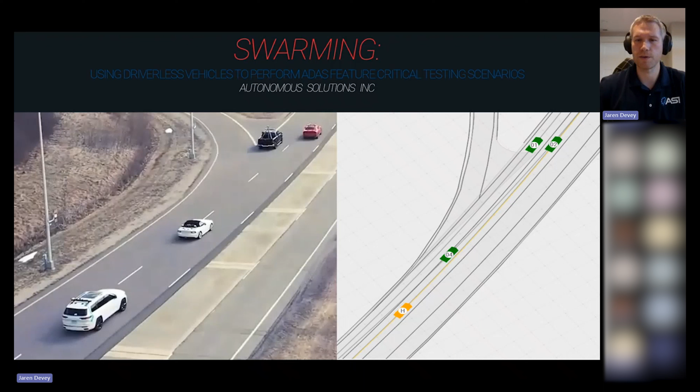So to answer these problems and be able to accelerate and produce more reliable testing of emerging ADAS technologies, ASI Automotive has developed autonomous systems capable of choreographed vehicle control. We call this swarming. Today, we will discuss what swarming is, why it's needed, and what are the results. In order to be able to present this material adequately, though, a couple of key ASI products and features will also need to be described. So we'll briefly discuss ASI's command and control software Mobius, as well as the ASI robotic system that interfaces with the vehicle. But first, let's just have an overview of swarming.

So, no awesome music. You may have seen some of our videos with some really good music, but I'll talk to some of these things here.

So the OEM vehicle, referred to here as the host vehicle, is shown as red in this video. The ASI controlled vehicles are referred to as target vehicles and are shown as white. This is just an example of the host vehicle sensing the target vehicles while the target vehicles are choreographed around the host. This invokes responses from the ADAS sensors on the OEM vehicle and the different functionalities. So these are real shots of initial testing of swarming with a simulated overview of the test.

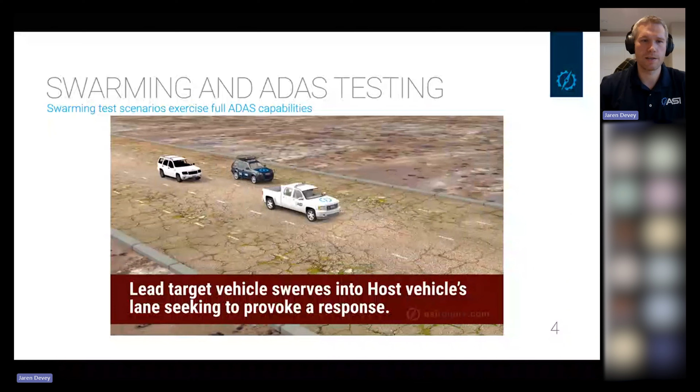And so this was one example that we did. The lead vehicle simply just passing in front of the host vehicle or the OEM vehicle. And this would elicit a response. Now this one is one of my favorites. This one I think of as someone missing their exit or about to miss their exit and crosses right in front of you on the highway. I'm sure this has never happened to any of us before.

But the scenarios presented in this video are only two of the several dozen scenarios that are already in use, many of which are running with 5+ vehicles at 65 miles per hour. So according to the levels of driving automation, we are currently testing around the level of L2+. This means that we are still technically in the driver assist realm, but incorporating a whole new layer on top of the traditional ADAS testing features.

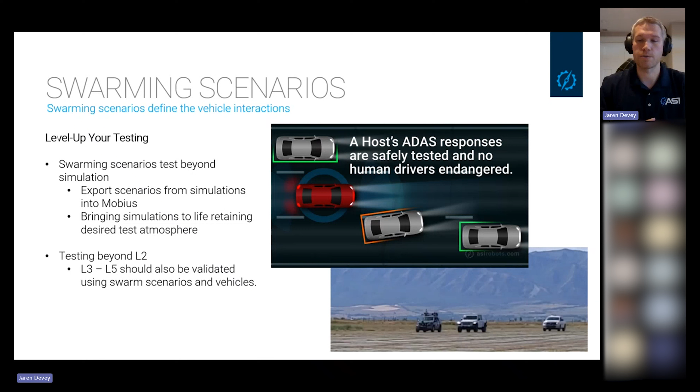Most other ADAS testing is done through simulation, but with our solution, you can export paths from your simulator and import them into Mobius to be run on actual vehicles. This will provide you with your desired test atmosphere and the option of higher or lower speeds depending on your scenario. So testing higher levels of automation, L3 through L5, will also experience the same gap that we've already talked about between testing and simulation and being released for testing on public roads. So these levels of automation should be tested using swarming scenarios and vehicles to bridge that gap.

Live testing of the complete ADAS platform provides more realistic results than a simulation can produce and is more rigorous than testing individual sensors and components. Swarming scenarios put the test vehicle directly into situations the vehicle could encounter while driving on public roads. With swarming, scenarios can be swapped within seconds, offering a lot more flexibility in testing. This allows for stress testing of ADAS features.

Swarming scenarios are often designed with a specific ADAS feature in mind, or can encompass multiple features in a single run. In these scenarios, the ASI robotic system is used to get the host vehicle posed correctly at a defined position and velocity relative to the target vehicles, and then engages and releases control to the OEM's ADAS.

The ASI robotic system regains control of the vehicle at a predefined position on the path after the ADAS portion of the scenario. ASI also commands control of the system in case of a failed scenario. The target vehicles utilize the same ASI robotic system to perform their portion of the swarm.

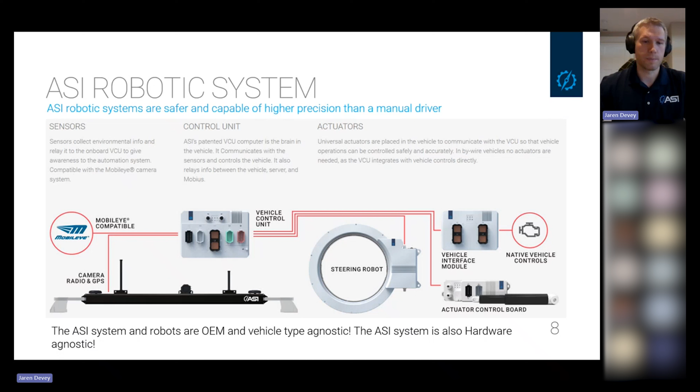So these ASI robots are professional drivers. These robots are already used in durability and misuse testing across over 17 OEM proving grounds. They are already taking drivers out of dangerous situations. Swarming is just a natural extension to what these robots are already capable of. Testing ADAS features in any realistic situation requires professional drivers to perform precise and dangerous maneuvers. These ASI robots are the professional drivers needed to ensure that safety and accuracy.

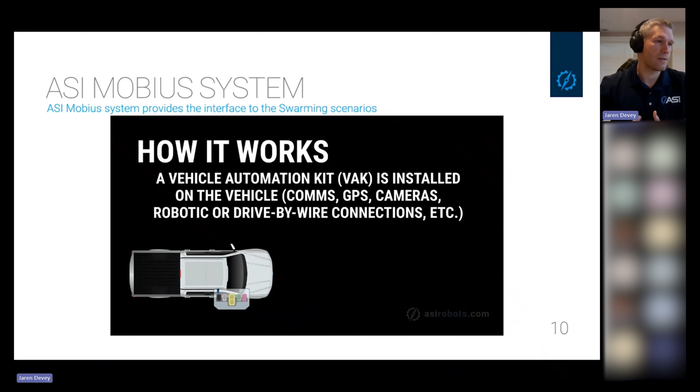So an overview of our ASI Mobius system. This is our command and control software. And so how this works is each vehicle will have that VCU in it, which is part of our overall vehicle automation kit, or VAK. That VAK is installed in the vehicle and then communicates to Mobius. And Mobius is installed on the site network.

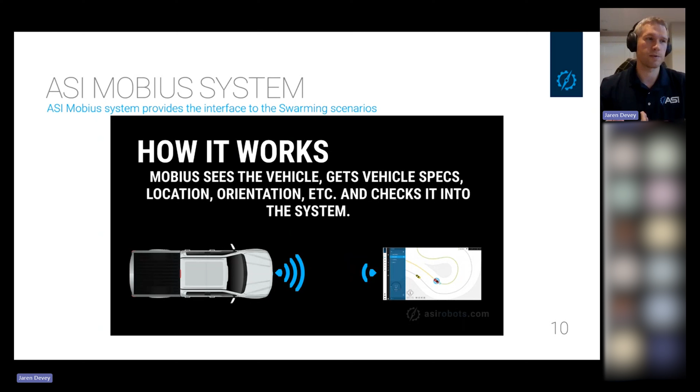And then Mobius can communicate with that vehicle and receives information from the vehicle configuration, like its overall profile and everything. Then Mobius can command the vehicle to go wherever you need it to go. The vehicle will receive those commands, store them locally, and then continue to drive its mission. So this is used already in durability, misuse, and ADAS testing.

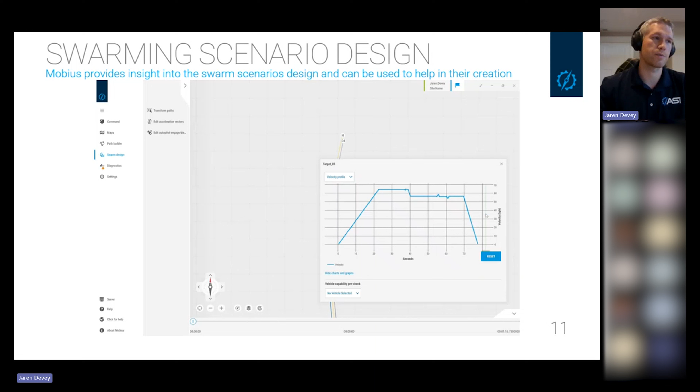Now I'll give a brief overview of our swarm scenario design and how that shows up in Mobius, our command and control software. So you can see here that we have several paths that are already defined. All of these paths are part of one swarming scenario. And you can see we show for these paths different things like the velocity profile or the acceleration profile. So all of these things can be previewed beforehand.

And these are imported directly from simulations. We also add the ability to engage and disengage the autopilot or the OEM ADAS features as necessary and at specific points, wherever you need them to happen. We've got here a time lapse of the swarm. And so you can scroll through the swarm scenario and see what's going to happen.

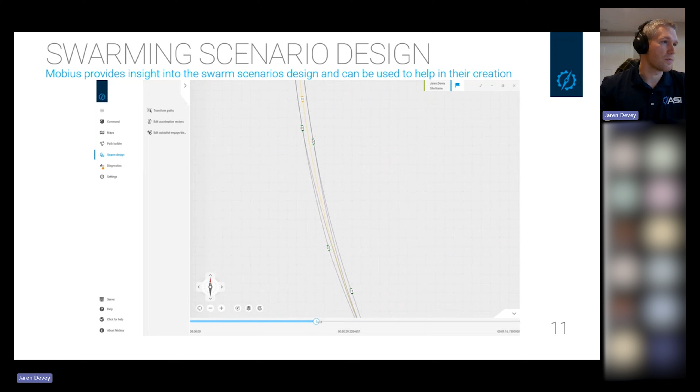For example, here, and we'll just zoom in. You'll see as we go forward in time that the target vehicle 5 is going to pass in front of the host vehicle. And so this is just a regular cut-in with multiple other actors involved.

And then as you continue to scroll through time, you'll see that the host vehicle will continue to follow the target vehicle. And this is just a good test of the adaptive cruise control, so ACC.

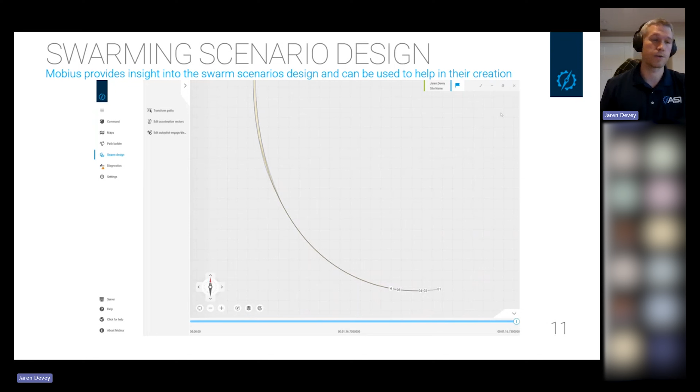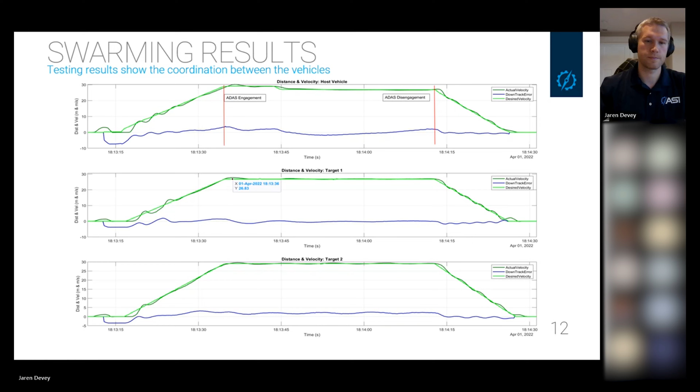On the safety side of things, a recent study titled Evaluation of Active Driver Assist Systems from May 2022 by AAA testing multiple L2 ADAS vehicles found safety concerns with ADAS performance and produced a recommendation that, quote, automakers should focus on refining ADA system performance in the context of edge case scenarios involving other passenger vehicles and VRUs.

Testing extreme ADAS responses requires multiple extreme test scenarios. These tests are complex and virtually impossible for human drivers to perform. This leads to errors and stress, which can all increase the risk of an incident and possible injury. Not only can the ASI robots perform these extreme tests, but they can repeatedly do so and without fatigue. ASI robots continually monitor the vehicle health data, for example, things like engine temperature, and can stop or prevent a scenario from running in unsafe conditions.

Mobius performs pre-planning path checks to only allow valid paths. This ensures there's no chance of a collision even at the maximum allowed error conditions. Removing human drivers from the vehicles makes testing the system safer. When vehicles do fail their scenario, smart stopping is triggered. Smart stopping enables one or more vehicles in a swarm maneuver to activate a safety stop for all the vehicles in the swarm. It utilizes V2V communication to allow vehicles in the swarm to make more intelligent decisions about how they come to a stop when the swarm mission does not go according to plan.

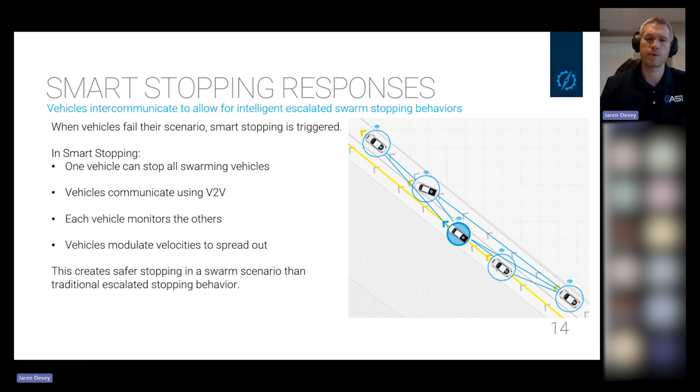ASI's lateral control algorithm utilizes clothoid path following techniques to achieve smooth control. Positional components of the path are sent from Mobius to the VCU. Using an ASI developed EKF, the position of the vehicle is estimated and then compared to the position on the path, and a lateral error is determined. The VCU then determines a steering angle to reduce the error. We refer to this lateral error as off-path error.

ASI's longitudinal control algorithm consumes the velocity, distance, and time trajectory from the swarm scenario. Using the aforementioned EKF, the estimated vehicle position is compared to where the vehicle needs to be along the path, and a longitudinal error is determined. We refer to that longitudinal error as the downtrack error. The longitudinal controller then determines the optimal throttle and brake position commands needed to follow the swarm scenario trajectory.

When exceeding maximum allowed lateral and longitudinal errors, an escalated stop using smart stopping is triggered. Work is being done to dynamically change these maximum error bounds to account for the planned distance between vehicles in a scenario, rather than having just static maximum values.

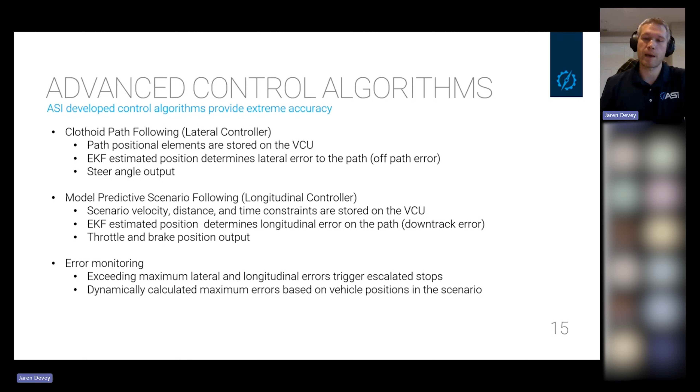With each of these vehicles having a robot inside of them, we wanted to determine the consistency of the robots. To view the consistency, we performed 8 runs of the same scenario without expressly changing any variables. We looked at 3 main measurements: the downtrack, the off-path, and velocity error, which is the difference between the actual vehicle velocity and the scenario specified velocity at that specific time.

For each of these measurements, we looked at 3 main metrics to compare the results: the average, maximum, and standard deviation. Over the next several plots, you'll see the combination of each of these measurements and metrics with each vehicle represented.

The first plot we are looking at shows the average downtrack within each of the 8 runs. Each of the 5 horizontal bar charts represents a vehicle, with the yellow bar chart being the ego or host vehicle. The green dotted horizontal line marks the average across the 8 runs. You can see those here, especially in the top one. The red dotted lines mark the maximum and minimums across the 8 runs. Down in the bottom right of each bar chart is a number showing the standard deviation for this measurement and metric across all 8 runs.

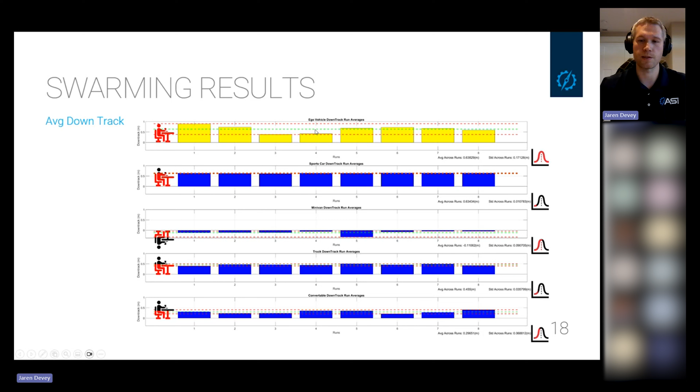Now, these numbers may be a little hard to see or imagine, so I've included some icons for size comparison. This is roughly the height of a person sitting down. The standard deviation icons here show the relative comparison to whichever vehicle has the most standard deviation across the 8 runs, which is, in this case, the ego vehicle with about 0.17 meters of standard deviation. These others show a rough percentage of that maximum standard deviation. From these plots, you can see that the ego vehicle had the largest variance between its runs in how well it matched the scenario positioning.

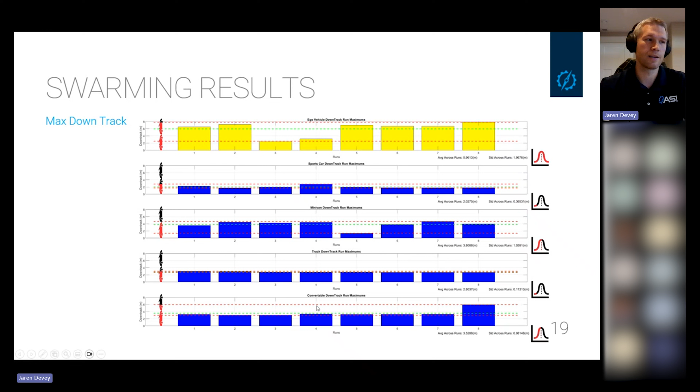Each of the robots has biases and tuning considerations associated with it, but performance is very predictable and accurate. One of the main considerations we have to make with tuning of our robots is the engine performance. We have found that the sports car and the truck tend to have more power, which leads to them getting further ahead on their path, while the minivan with less power tends to fall behind a little bit.

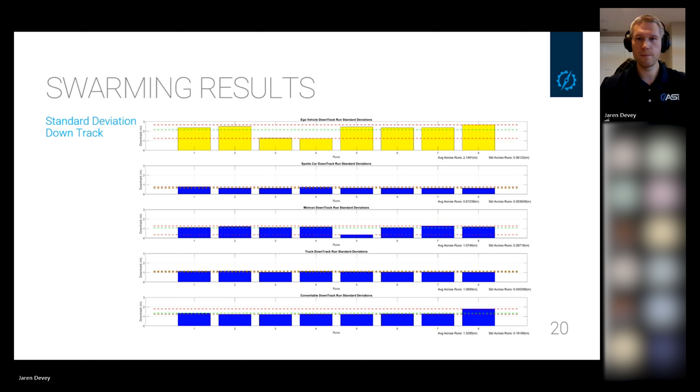This plot here shows the standard deviation of the downtrack errors within each of the 8 runs. This helps us determine how consistent the vehicle is within a single run compared to the scenario it is trying to follow. So you can see very consistent between each of the runs with a lot more variation on the ego vehicle or host vehicle. And for another size comparison, this is approximately the length of a single car.

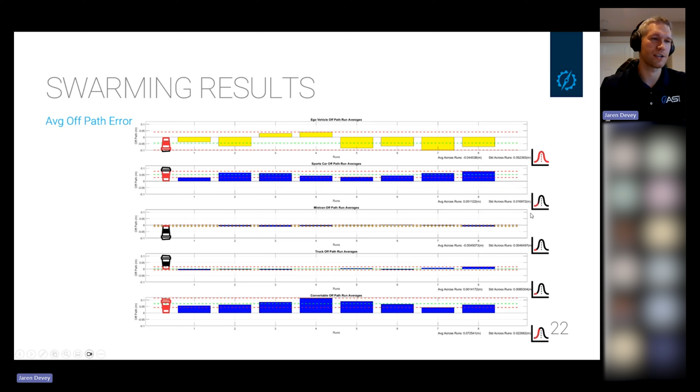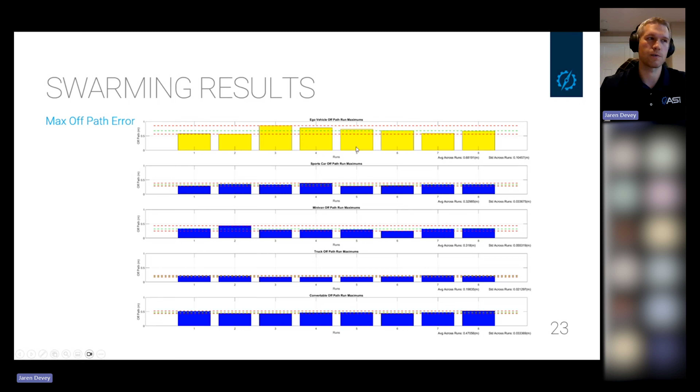Now this plot shows the maximum off-path error within each of the 8 runs. These maximums help us determine if there is a high curvature section of the scenario path that we need to specifically consider, like a lane change, in the vehicle's tuning. The ego vehicle tended to oscillate during the run within its lane, especially if there was a high curvature section of the road. So for size comparison, this is roughly the size of a 4-year-old child.

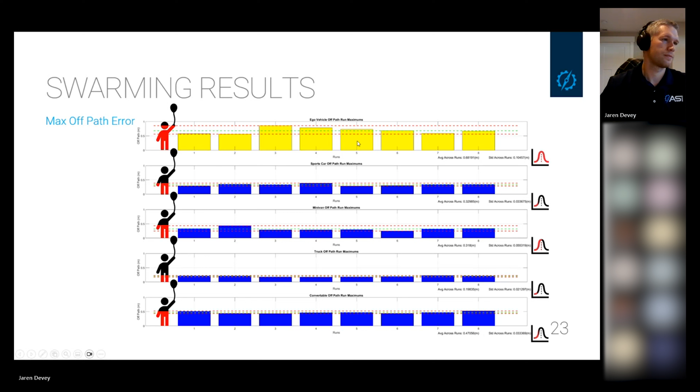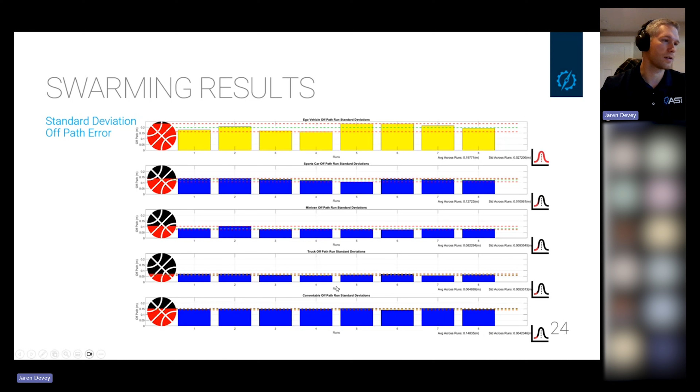Now this plot shows the standard deviation of the off-path errors within each of the 8 runs. So again, you can see more variation in the ego vehicle than with the target vehicles.

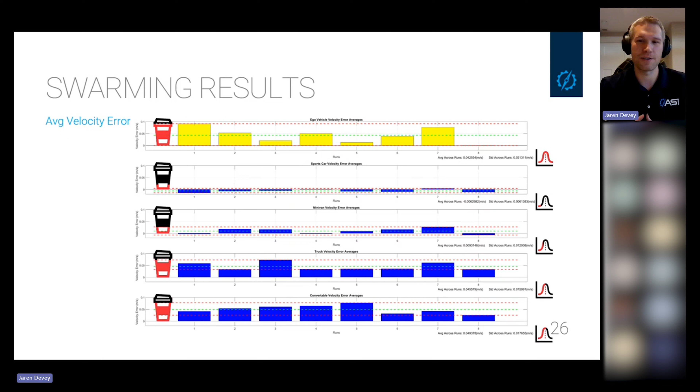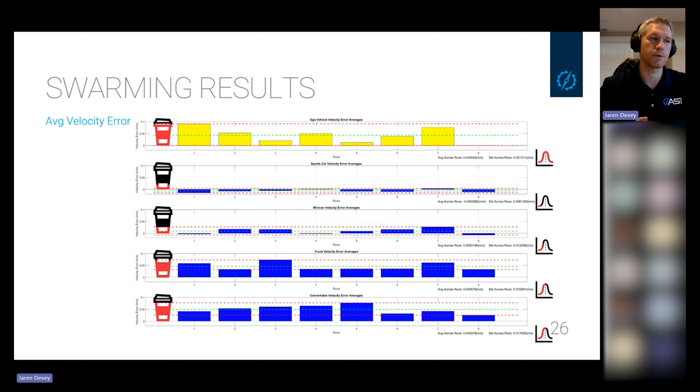This plot shows the average velocity errors within each of the 8 runs. The low magnitudes here, you can see from this wonderful coffee cup comparison again, show that the vehicles all do well with their velocity control. This means that the cruise control portion of the ACC performs well on the ego vehicle, but still has some variations. And with this in mind, you can see that the velocity control on most of the target vehicles performs very well and consistently as well.

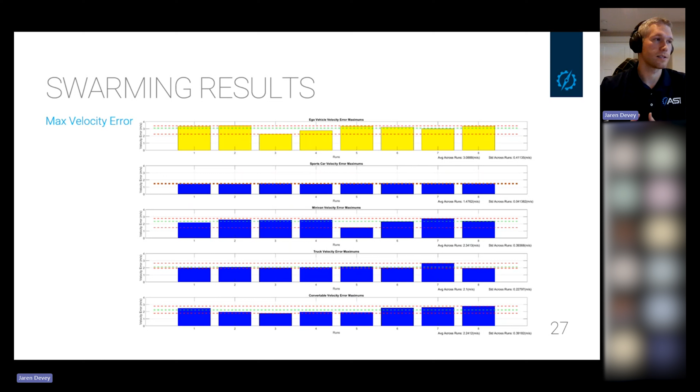This plot shows the maximum velocity errors within each of the 8 runs. These maximums tend to come from the acceleration and deceleration stages, which are often outside the times where the ADAS features are used in the scenario. So these maximums, even for the ego vehicle, tend to come from the portion of the scenario where the ASI controller is strictly in control. That's not true for every single case, and there were some of these where the ego vehicle was expressly in control and still achieved a higher velocity error.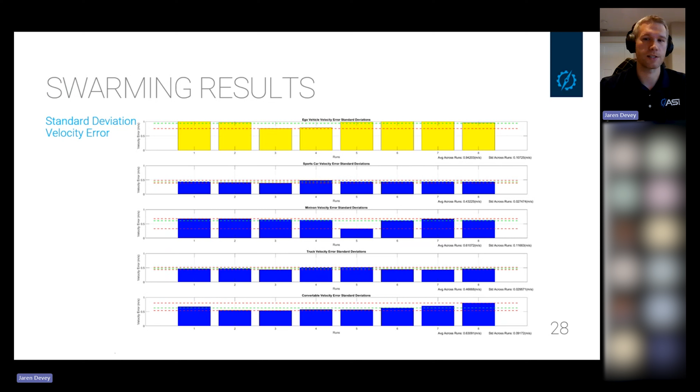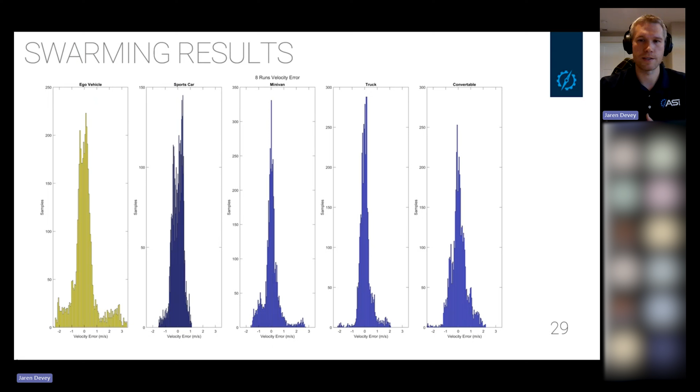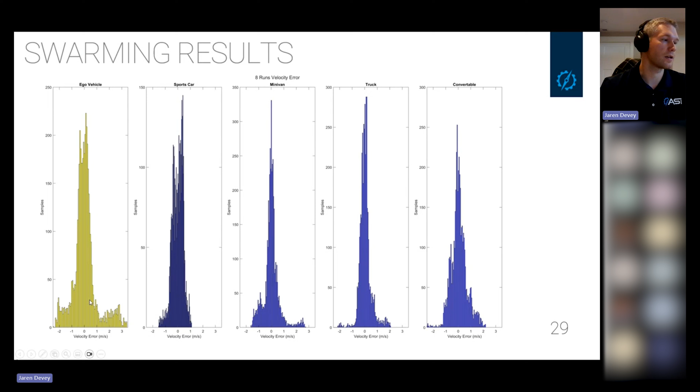And this plot shows, as we've seen with the others, the standard deviation of the velocity errors within each of the 8 runs. And the final plot here is, again, a histogram of all the velocity error data from all 8 runs. And so you can see that there was a larger spread with the ego vehicle again, with most of the vehicles still having a good narrow band in their velocity error.

Because of data like this, ASI has determined that swarming is highly aligned with the testing of the following and more features of ADAS. Swarming lets you test all these systems simultaneously in real-world scenarios with real-world vehicles. So the adaptive cruise control system that we've already talked about, also forward collision warning, advanced emergency braking systems, blind spot monitoring, adaptive front lighting systems, lane departure warnings, and lane keeping assist systems.

Since swarm scenarios are designed to trigger a specific response from the ADAS, the exact expected time of these triggers is known. If the swarm was successful and the expected trigger did not happen, this is a clear indication of a functionality failure of the ADAS component.

There are several other features that Mobius and the VCU are capable of performing. I won't get into all of these today, but a couple that I wanted to address are map editing, geofencing, and the robotic safety rider. So map editing is a powerful tool Mobius provides to be able to define the roads and the areas the vehicle needs to stay within. This allows the user to visualize where the swarm scenario will be run.

Geofencing is one way that Mobius maps provide safety. Mobius continually monitors the vehicle's position and determines if the vehicle is approaching a map edge. The ASI system will then either slow down, bring to a stop, or bring all swarm vehicles to a stop using smart stopping.